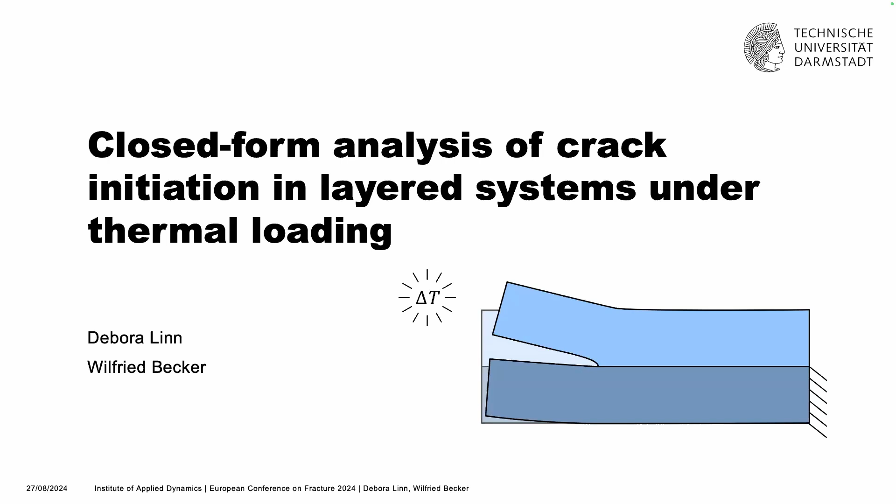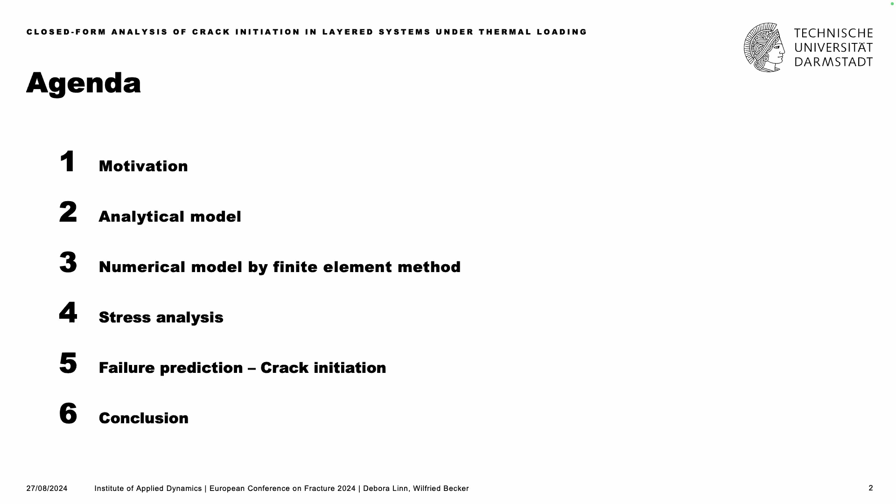So the topic of my talk is the development of a closed form analytical approach for a simple generic configuration. This generic configuration serves as a simplifying model for many different applications or situations. For example, if you look at concrete structures that are locally reinforced or repaired with reinforcing patches, the debonding of these reinforcing patches is very important to analyze. Another example where the initiation of debonding cracks is a typical failure case are, as you've seen before, the single lap joint or a double cantilever beam.

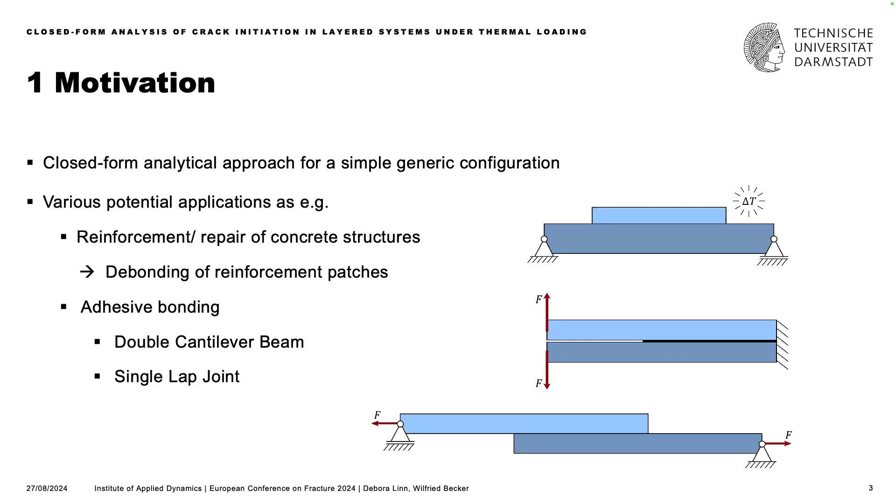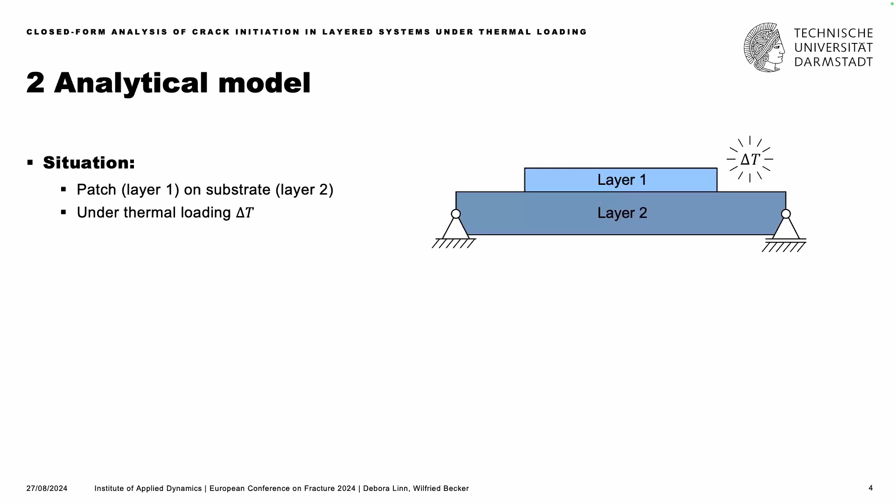So let me continue with the situation we look at. We look at the situation of a patch on a substrate under thermal loading, as you see on the right. Both layers are modeled with linear elastic material behavior. Now the idea is to reduce this situation to the overlap length to get a generic configuration. The advantage of this generic configuration is that other load cases can be applied as well.

You only have to apply other boundary conditions at the edges on the left and right. So the goal is now to get an approximate closed form analytical description of the deformation, stress, and strain field within these layers.

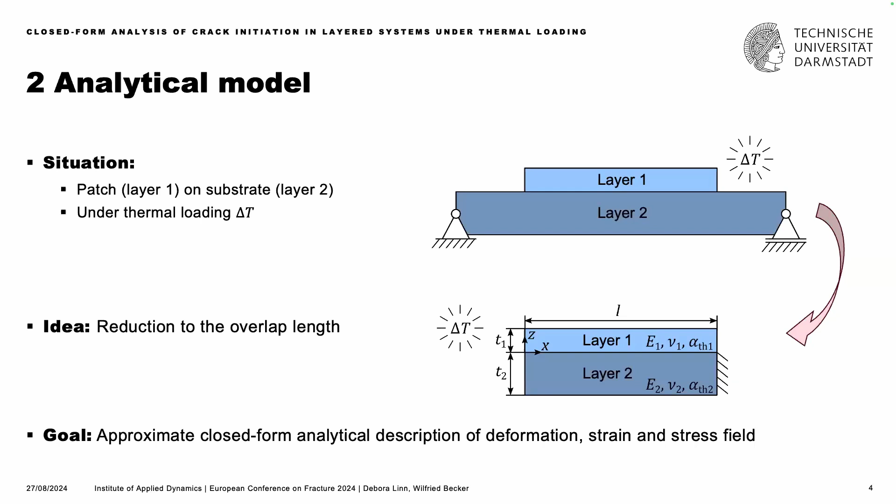For the displacement, I choose a closed form analytical description. I choose a higher order displacement approach, as you see here—more precisely, a second order displacement approach, extended with an additional term. If you look at the situation, you see that stress singularities appear at the edge between both layers, and these stress singularities are taken into account in this additional term. That's the reason this 0.7 is standing here—that's the singularity order of the system.

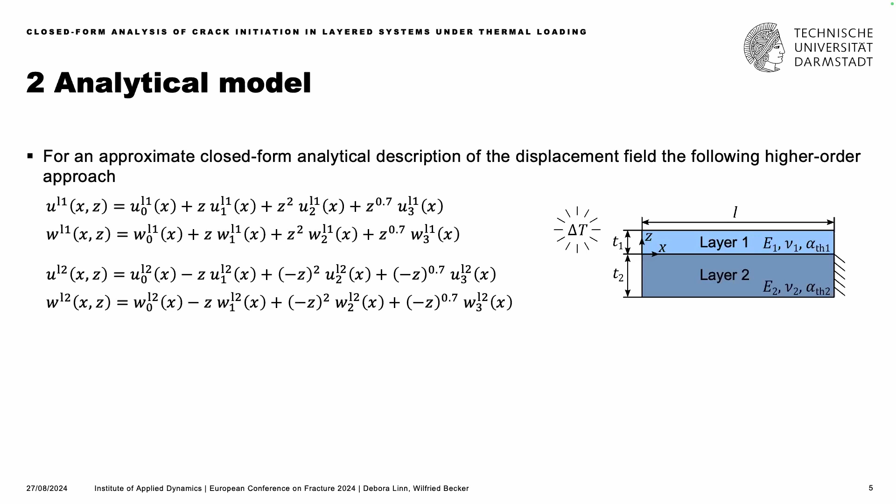So the goal is now to determine these unknown functions dependent on x, which is done with the principle of minimum total energy.

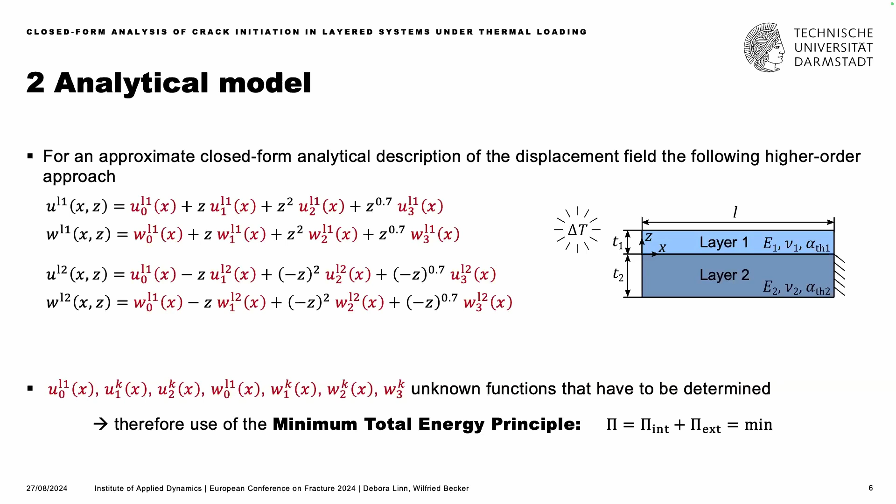In the next step, Hooke's law, kinematic relations, and the displacement approach are inserted into the total energy, so that the total energy only depends on functions dependent on x.

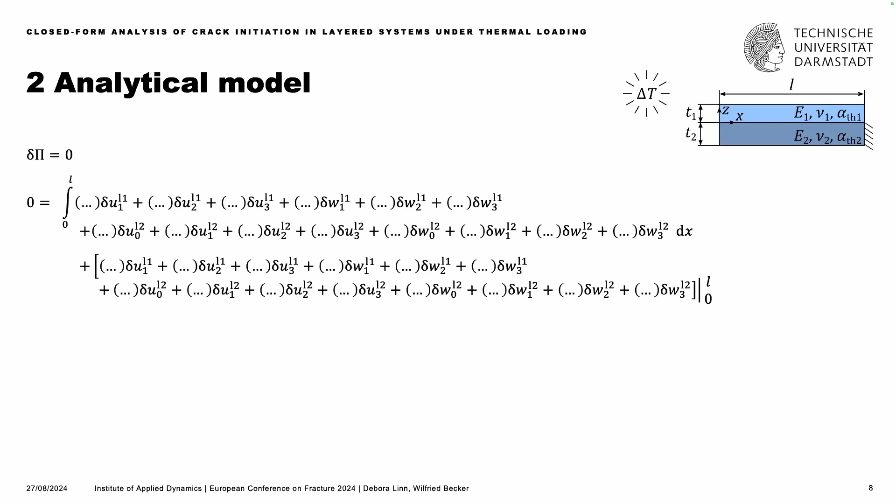This differential equation system is a system of second order and must be reduced to a first order system to get a solution. As I said before, the differential equation is non-homogeneous, so the general solution consists of a homogeneous and a particular solution. While the particular solution is determined by using the method of undetermined coefficients, the homogeneous solution is generated by solving an eigenvalue problem. So we have this general solution as you see here.

Here the constants C1 to C28 must be determined, which is done by evaluating the 28 boundary conditions. Evaluating these boundary conditions leads to the deformation field, and based on the deformation field, the strain and stress field within the layers are known. So the stress analysis can be carried out.

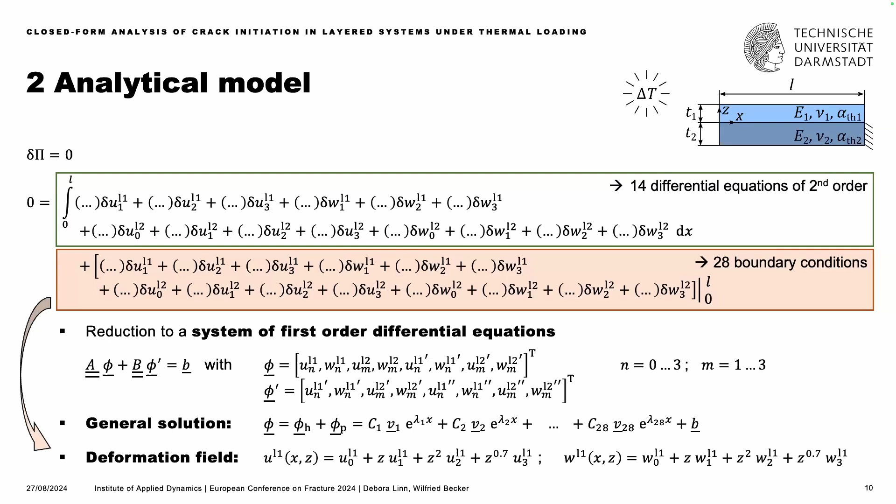As I said before, the analytical model is now compared and validated to a numerical model within the stress analysis. The numerical model is modeled by finite element method in the program Abaqus, as you see here. It is discretized in a way that the mesh is at its finest at the free edge between both layers at the interface, and it gets larger towards the other edges.

The model has about 1.1 million degrees of freedom. There are quadratic basis functions used, and it requires something about 70 seconds to calculate.

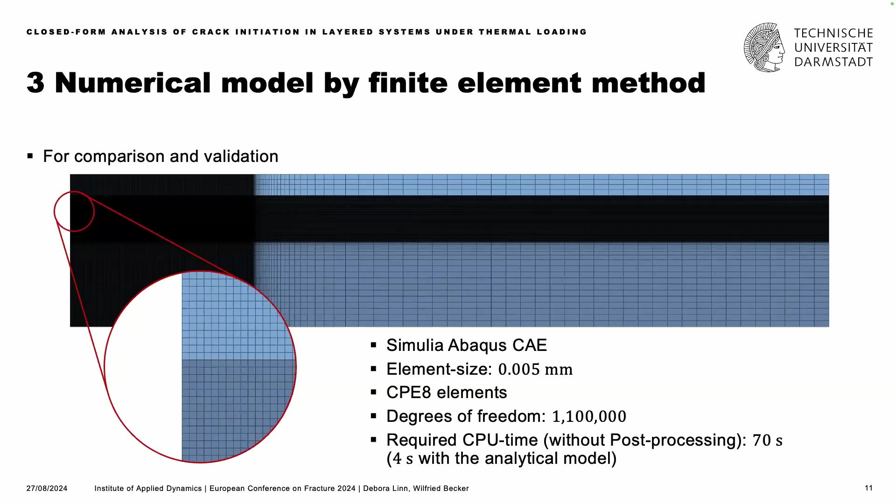Now let's have a look at the stresses at the interface between both layers. You see them here for the situation of a patch on a substrate under thermal loading.

The interlaminar stresses at the interface are shown on the right-hand side. The curve in blue represents the peel stress, sigma z, and the curves in red describe the interlaminar shear stresses. The solid lines are the results from the FEM, and the dashed lines are the results from the new analytical approach.

Comparing both curves separately shows very good agreement between the new approach and the FEM. Also, the stress singularities at the free edge are approximated very well.

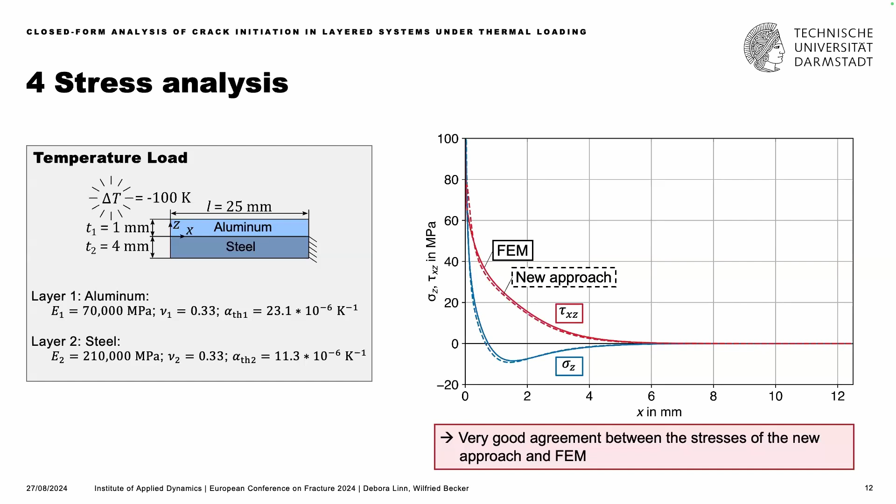As I said before, this generic configuration can serve as a simplifying model for other load cases as well, for example the double cantilever beam, shown on the left, and the single lap joint, shown on the right.

Again, the stresses are shown at the interface between both layers, and again there is very good agreement between the new analytical approach and the FEM.

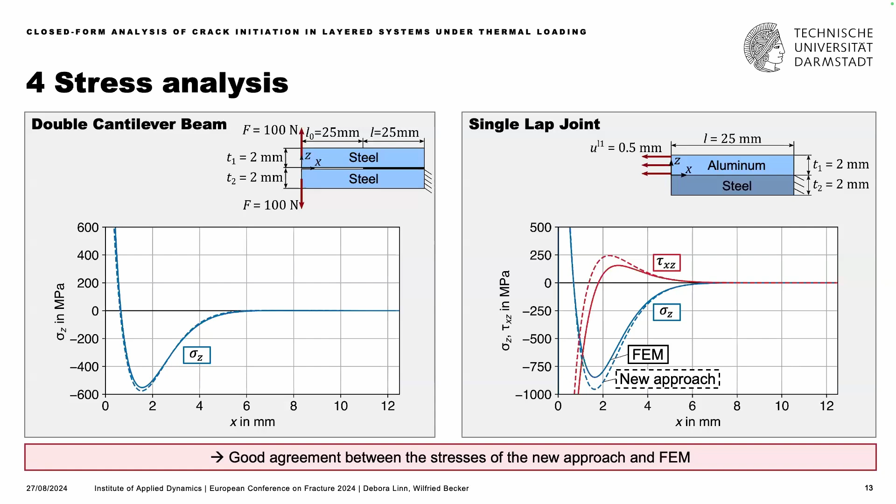So we can go to the failure analysis within the framework of finite fracture mechanics. To model a crack with the analytical model, the model must be extended.

We mentally divide this model into two areas. The first area is the purple one, that's the cracked area, and the second area is the uncracked area, which is modeled as before.

When calculating the displacements in this model, you have to choose different displacement approaches for the left area and for the right area. And when solving an eigenvalue problem, you don't only need the boundary conditions on the left and on the right, you also need transition conditions at the boundary between both areas.

The rest of the procedure remains the same, so the failure prediction within the framework of finite fracture mechanics can be done.

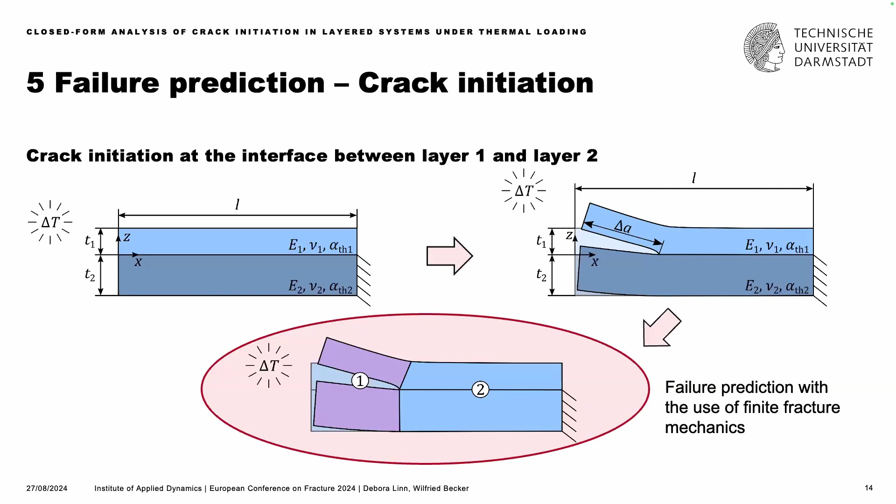For finite fracture mechanics, I use a coupled stress and energy criterion, which was postulated by Leguillon. It says that a crack of finite length will instantly form when the coupled stress and energy criteria are fulfilled simultaneously.

As a stress criterion, we use a quadratic stress criterion, which considers the interlaminar stresses at the interface between both layers for the uncracked model. Those are the stresses I showed already.

For the energy criterion, we use a linear criterion, which considers the incremental energy release rate, calculated as shown here. These are the interlaminar stresses and the crack displacements.

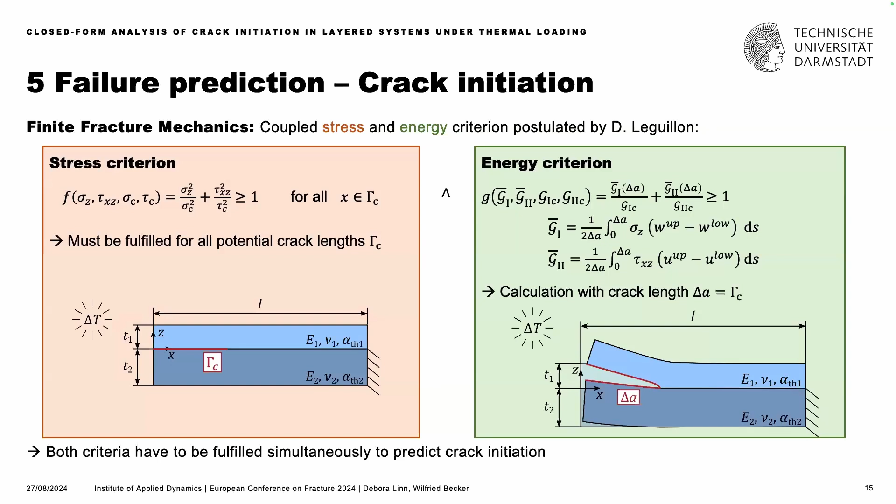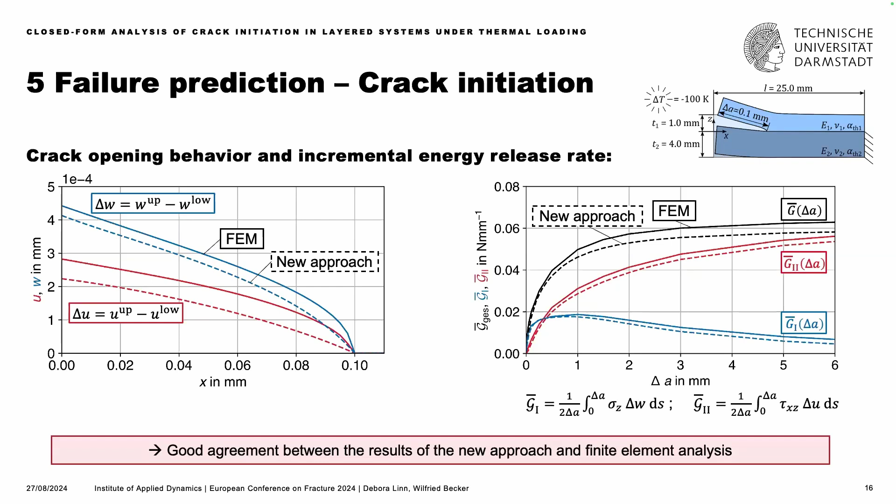Going back to the coupled criterion, both criteria must be fulfilled, and this is the case when both criteria are greater than or equal to 1.

For a temperature load of minus 189 Kelvin, the stress and energy criterion are simultaneously fulfilled for a crack length of 2 millimeters.

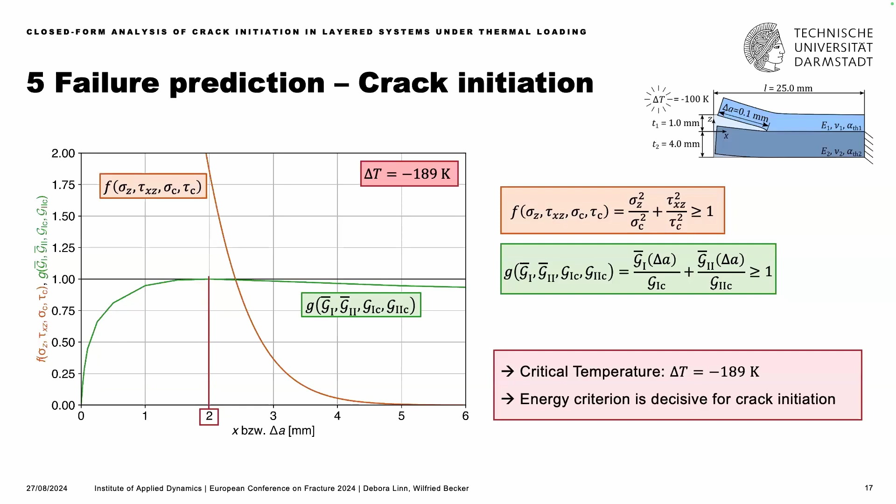Let me close the presentation with a short conclusion. I considered a very simple model of a two-layered system, which serves as a simplifying model for different load cases, for example a patch on a substrate under thermal loading, or adhesive joints like a double cantilever beam or a single lap joint.

I developed an approximate closed-form analytical approach to describe the deformation, strain, and stress field within these layered systems. I carried out a failure analysis within the framework of finite fracture mechanics, using the coupled stress and energy criterion to predict the initiation of a crack.

It shows that the results between the new approach and the FEM are very good. Other advantages of this analytical model are that it gives more physical insight and allows parameter studies very well. The much shorter calculation time is a further point to mention.